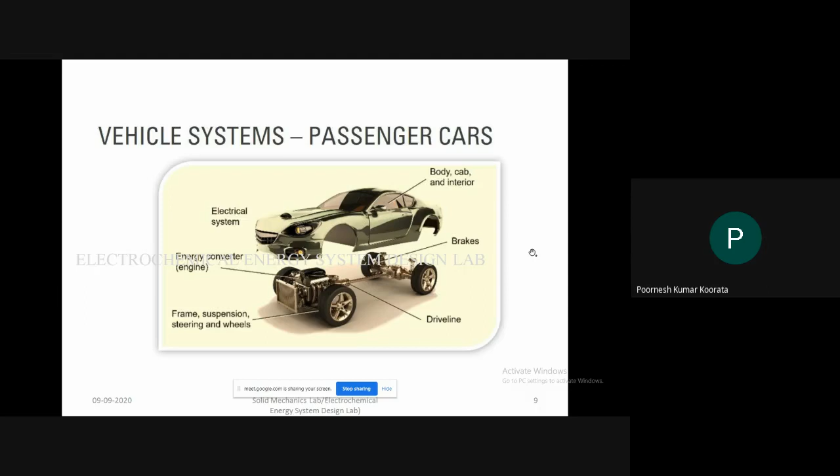Now, what we call a general powertrain, we mean the IC engine powertrain. There is nothing like a general powertrain. We have to distinguish whether it is run by an IC engine or any other power source. So depending on the power source, we have the powertrains here.

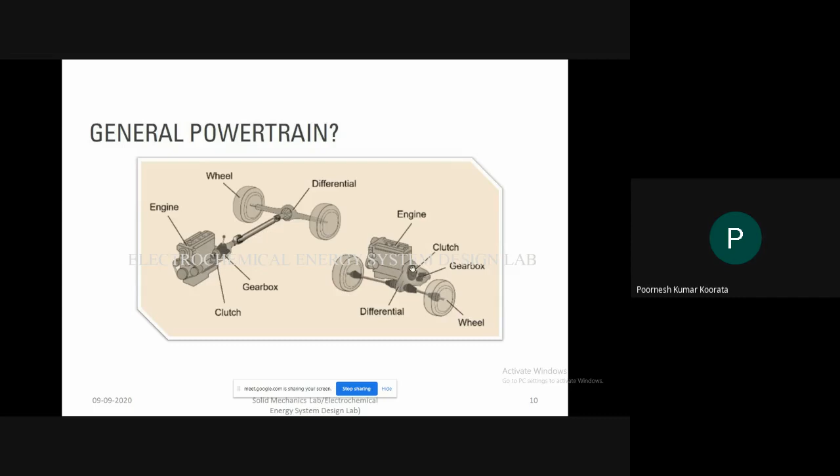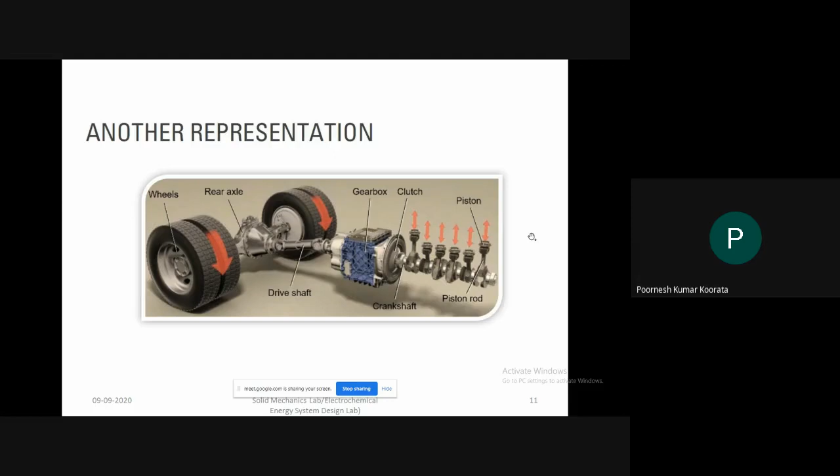For the IC engine, you have the power source in terms of engine, differential gearbox, and wheel. So engine to wheel transmission, and on the axle you have a gearbox and clutch with the engine, differential gearbox, and wheel. Another representation of the same is that you have the wheels and axle. Power is provided by the engine, with clutches to manage the power with the help of the gearbox and the drive shaft. So this is the conventional notion, sometimes referred to as the general powertrain, but it is not general.

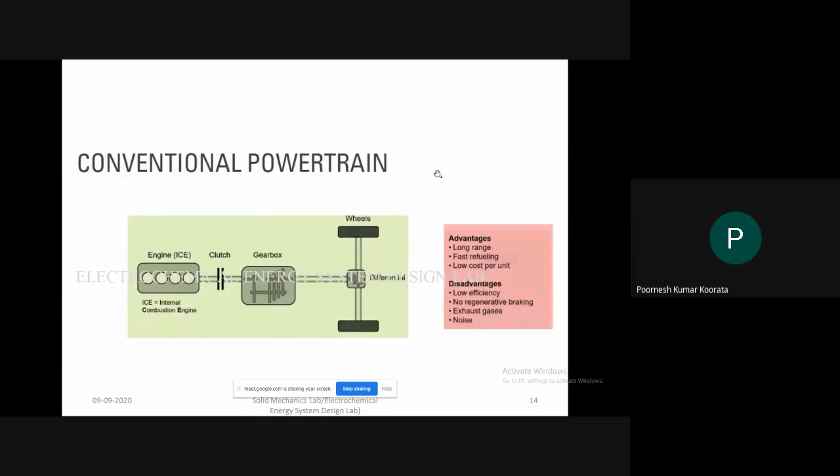Okay. Here I want to mention that energy density and power density are different. So battery has a good power density, but it has a lower energy density. So compared to supercapacitor and battery, supercapacitor has a high power density compared to the battery, but it discharges at once. So that's the drawback there. So battery is somehow suitable for electrical vehicle applications. But this factor we need to address.

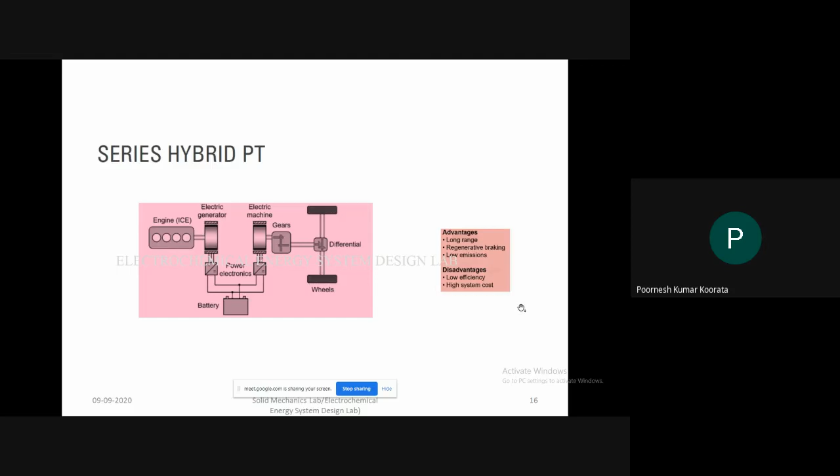And parallel hybrid is another concept where you have power either produced by electric machine or engine. So you have a parallel combination here with respect to engine and electric machine. So here you are actually taking care of the drawbacks that the series hybrid powertrain was having, that is in terms of the sizing. You can downsize the whole powertrain system with parallel hybrid, but it has also some other disadvantages like limited regenerative braking, because the generator component is not there here.

But some vehicles are having this. That's why there is limited regenerative braking and also higher cost. So other advantages are regenerative braking is there but limited. Design similar to conventional vehicles because it doesn't have a series combination there. It's a single powertrain, so you can have the advantage in terms of this parallel hybrid powertrain.

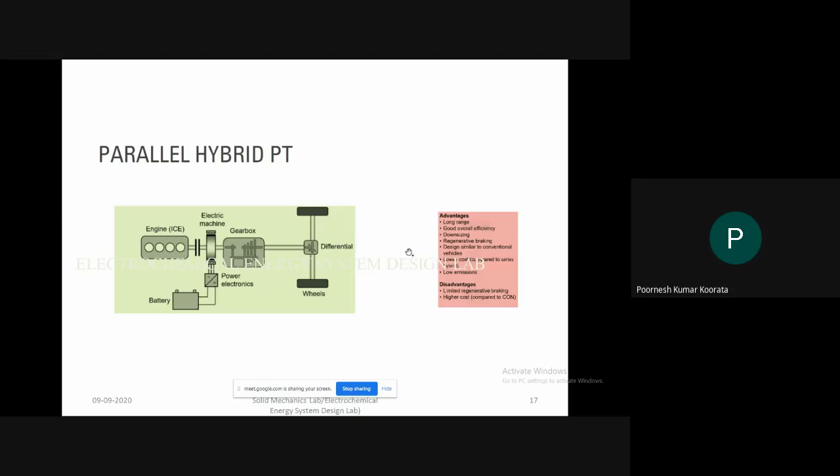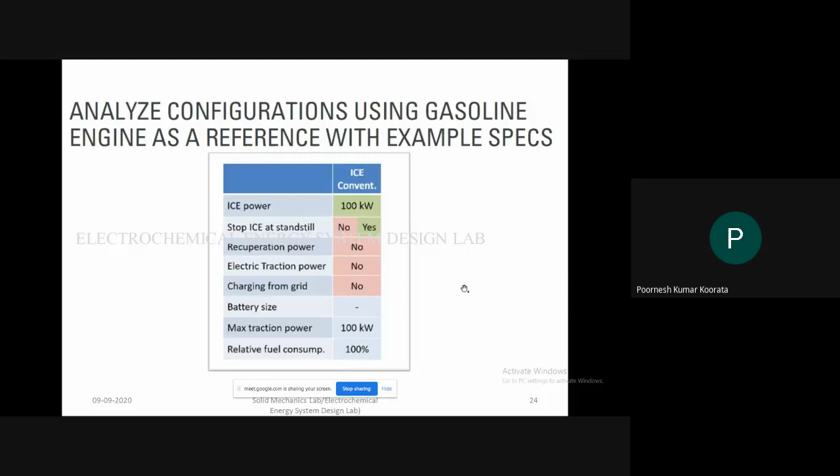Okay. A mild hybrid, one of the examples here. Now, so I have explained you that it should meet the fuel consumption standards at minimum cost. Okay. So customers not paying extra for low fuel consumption. This is the requirement. So it's similar to the basic conventional IC powertrain. For some performance improvement, that means you can reduce the size of the IC engine if you implement the mild hybrid. So how does it play? So IC power

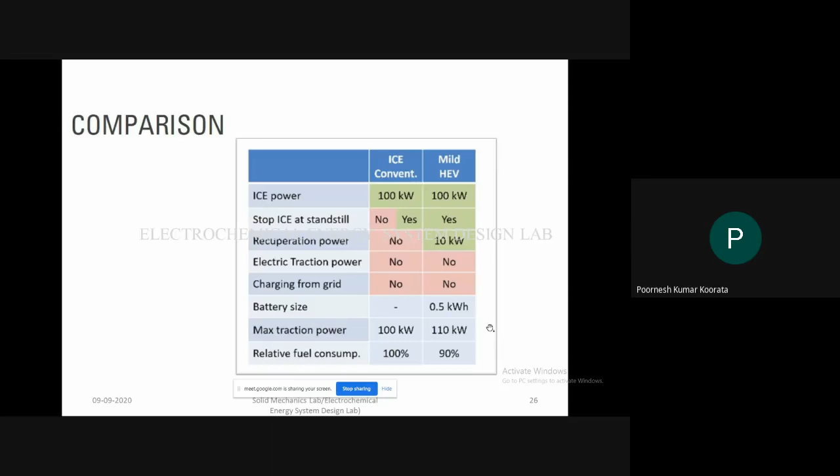Now full hybrid. So this is a bigger electric machine requirement. Toyota Prius is an example. Most of the braking is regenerative. That means you need to have that component, and all electric drive mode at lower power demand. Okay. Medium performance improvement compared to the mild hybrid. So in that perspective, if you see, there will be a regeneration. Also, there will be an electric traction power.

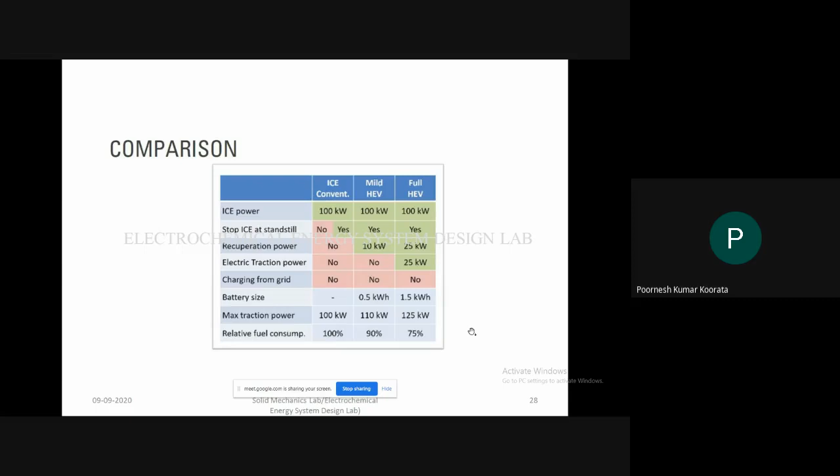Okay. So the power is utilized from IC power plus electric traction, either of these two. So that's why 125 kilowatt is the maximum traction power available. So the battery size also increases from suppose 0.5 to 1.5 kilowatt hour. Now in this case, the fuel consumption will be better. That's around 75% consumption.

A plug-in hybrid. So whenever the concept of plug-in hybrid is there, you mean that battery size will increase. Okay. So modest performance in all electric mode. It will give a good performance in all electric mode. But the driving range is limited to around 50 kilometers. So based on the conventional ICPT, there is a performance improvement, and Volvo V60 is the example for that.

Okay. Now, if you compare that, you will have IC power 100 kilowatt, then stop IC at standstill, yes, possible. Recuperation power is 50 kilowatt, higher. Regenerative is higher, electric traction is higher. So the maximum traction available is 150, 100 plus 50. So you will have 150 kilowatt. And also you will have the higher battery size. That's why you have the higher electric traction power here. So 10 kilowatt hour battery, and fuel consumption is 25 to 50%. See there.

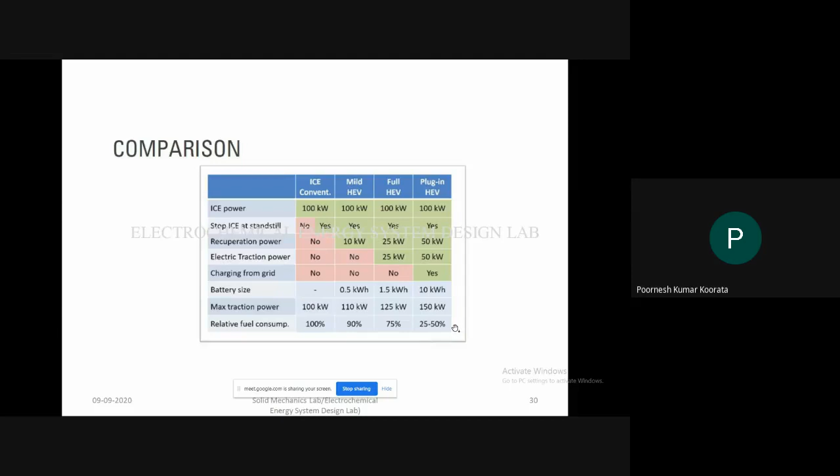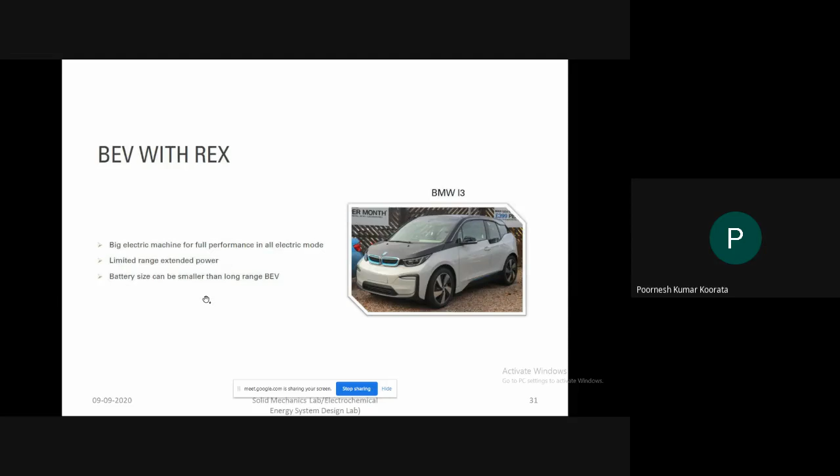Now BEV Rex will have the example of BMW, and it will have the big electric machine for full performance in all electric modes. So limited range extender power will be there, and battery size can be smaller than long range BEV, because this is a range extended, just an upgradation of the previous plug-in hybrid. So you have the BEV Rex option. Now in that case, you will have the compromise.

You can compromise with respect to IC power, because you have a lot of power generated with respect to the electrical thing. Okay, battery size is bigger. So 100 kilowatt you can get from the electric traction. Also you can regenerate; whatever the lost power, you can recuperate that power. Plus you have extra auxiliary kind of power from the IC power. Battery size is higher, more than 20 kilowatt hour. So maximum traction available is 100 kilowatt. So you can see the relative fuel consumption has gone from 100% to 10% here. BEV Rex. Okay.

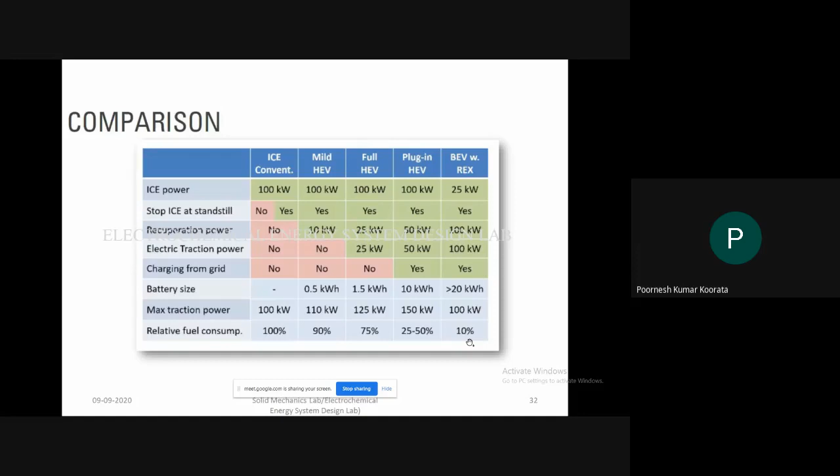Now going for the full electric, one of the models shown here is of the Tesla. A big electric machine is required, which allows full performance in all electric modes. So range is more than 200 kilometers. Fast charges to extend range. So you have the higher range here, not just extended, it's a good range, 200 kilometers.

Now here, if you compare, then there is no need of IC infrastructure or ICPT. So the IC power for the BEV is 0, it's not relevant at all. Stop at standstill. So recuperation power is 100 kilowatt and electrical traction power is 100 kilowatt. So maximum power traction is 100 kilowatt. So you will have the fuel consumption is 0%. So see the evolvement from 100 to 90, 75, 50 and to 0. So this is how you have come to the BEV stage where the electric machine plays a major role in terms of fuel efficiency, fuel consumption.

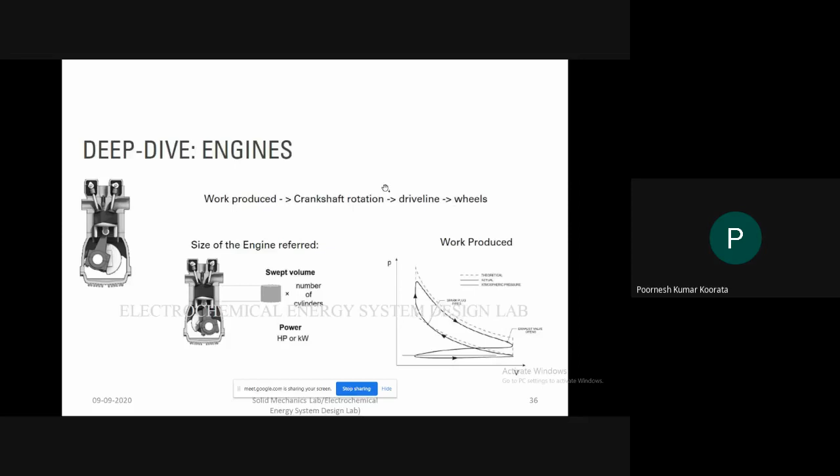So you have the theoretical and actual experimental kind of a loop here. Experimental curve. So theoretical curve is only like this. So you can see that based on this, efficiency of the IC engine can be predicted. So size of the engine mainly refers to the swept volume, how much volume can sweep, and the number of cylinders. So the power is actually given by HP or kilowatt. So it's in a very broad context I am making this statement.

Now, if we are going for the IC engine, we have to take care of the losses. So a lot of work is going on there. I think your HOD might be familiar with this. So engine available work is gross work minus the pump losses, mechanical losses, auxiliary power losses. You can say that if you have the 100% availability of energy, then there will be a heat loss, heat loss due to exhaust loss, pumping loss, friction loss, and final power obtained is only 20% there. So this is the powertrain output you will have.

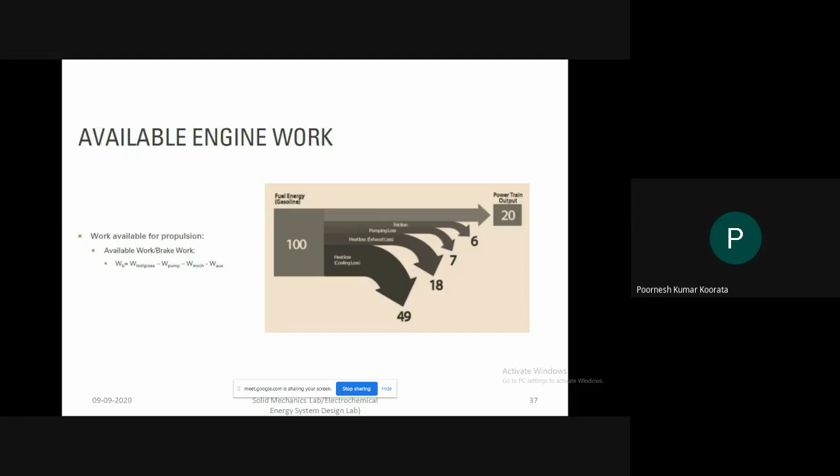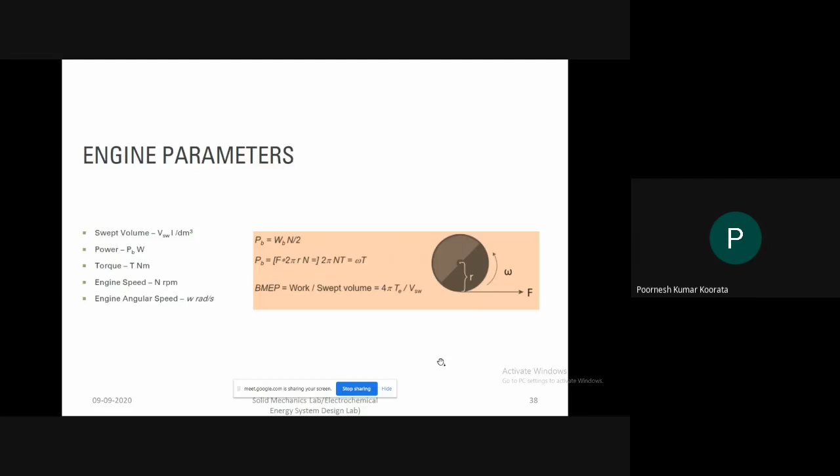Now these are engine parameters where you have the PB, that's the effective work, what you got. WB is this one, available work. So available work N by 2. PB can also be written in terms of the rotation into torque, and BMEP, that's the work by swept volume, can be given by this term here. So these are the familiar terms with respect to swept volume, power, torque, engine speed, and engine angular speed. So this is the important factor, factor R, crank radius there.

Now efficiency, coming to the efficiency, you have this PB by PC. So PC is nothing but the fuel power. Then brake specific fuel consumption, if you want to go, you need to know the MF, that is the fuel flow into the engine divided by PB. This is given in terms of grams per kilowatt hour. Sometimes people also put in kilogram, but grams per kilowatt hour is the usual notion for that.

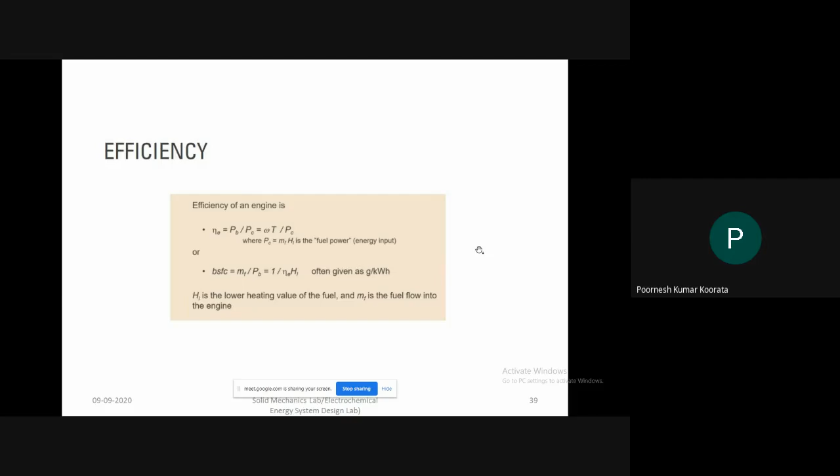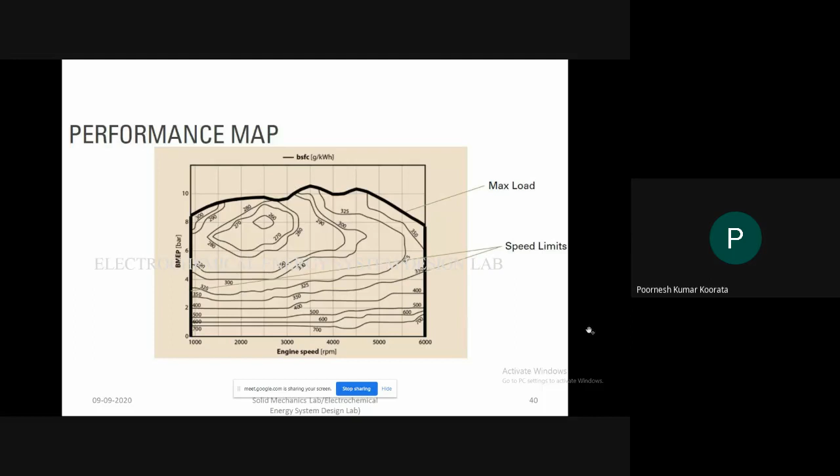BSFC is one of the important parameters, and we want to operate the vehicle, of course, where there is a low consumption of the fuel, right? So we don't want to consume the fuel too much. So this is the area where we want to operate, but for the practical conditions, we may have to check how this performance will vary. So I hope you got the knack of this performance curve.

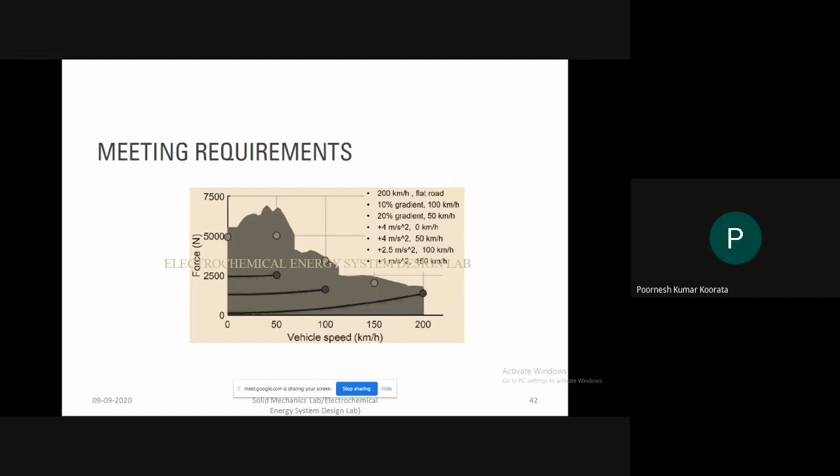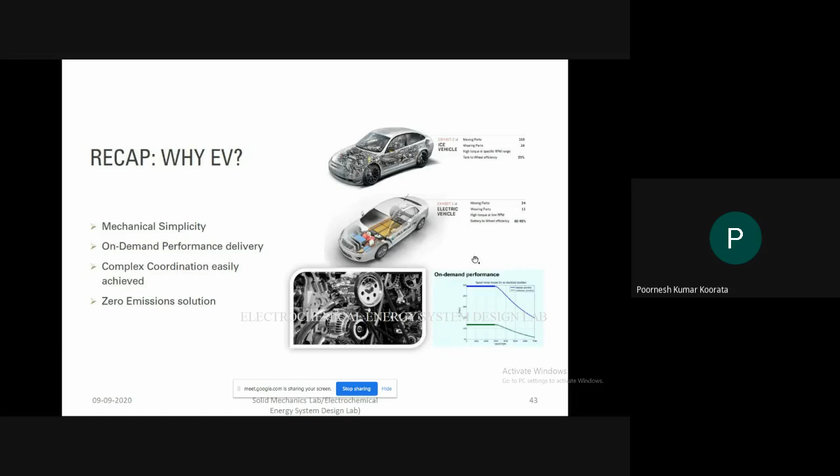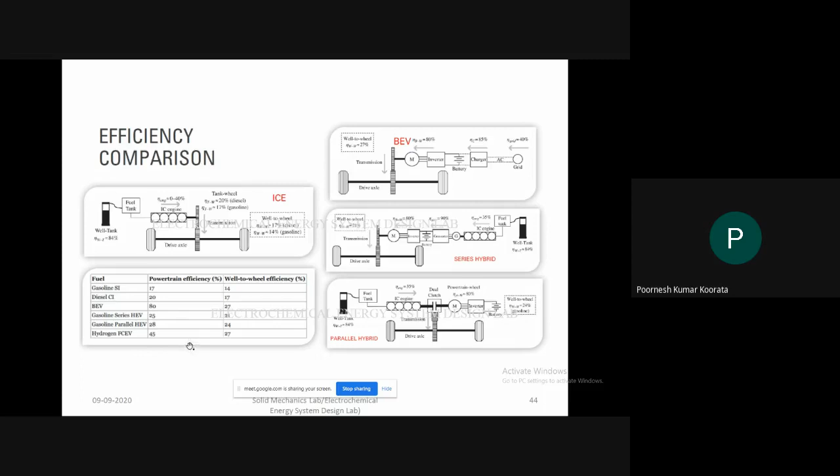I'm also taking the course on that, actually, hydrogen FCEV. Anyway, coming to electric machines as powertrain. The design parameter here becomes the shaft torque versus shaft speed. Okay. Now electric machines will have armature, right?

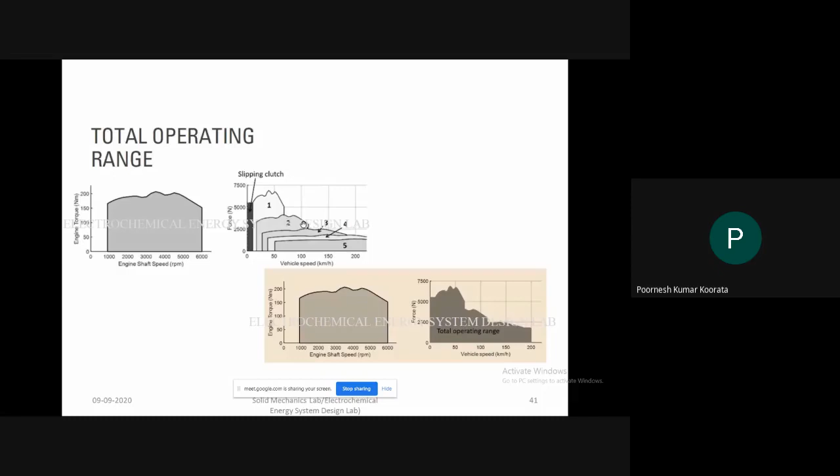So there are many issues with the IC engine in that respect; you have limited flexibility. You see the curve I've shown here. If you are going from the first curve to the second curve, there will be a grayed out area, which cannot be operated by the IC engine. But the electric machine is flexible. It can operate within this range.

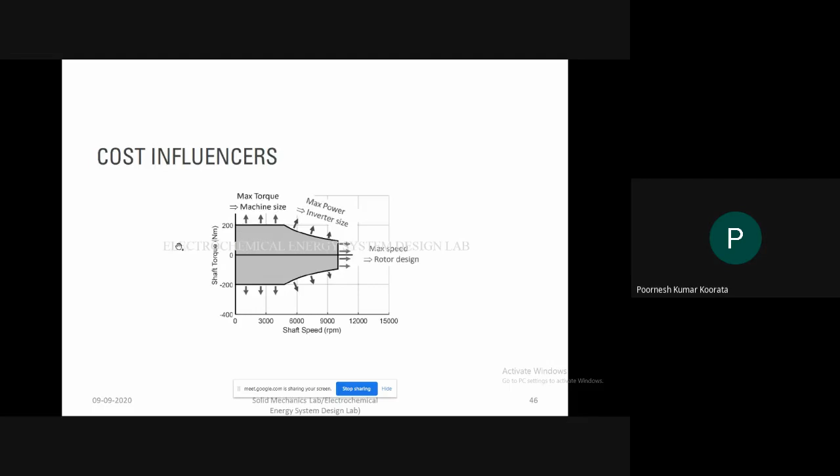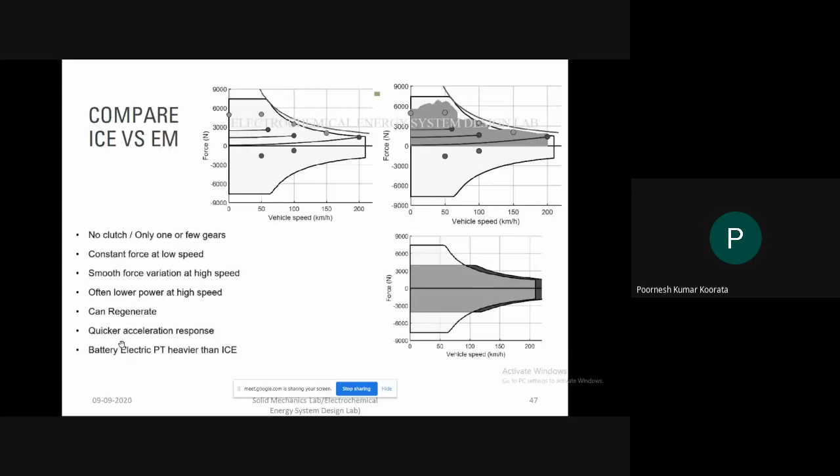Very smooth transition. Often lower power at high speed. Okay, so can regenerate, quicker acceleration response. Battery electric powertrain is heavier than IC engine because the weight component is mainly coming from the battery actually.

Now this is an application example of how you control. Can you predict the performance of the plug-in hybrid electric buses? Okay. So plug-in hybrid means you will have the engine as well as the battery electric machine, right? So CNG engine, you have electric machine, controller for the battery here, and wheels. So this is some of the real picture of the powertrain.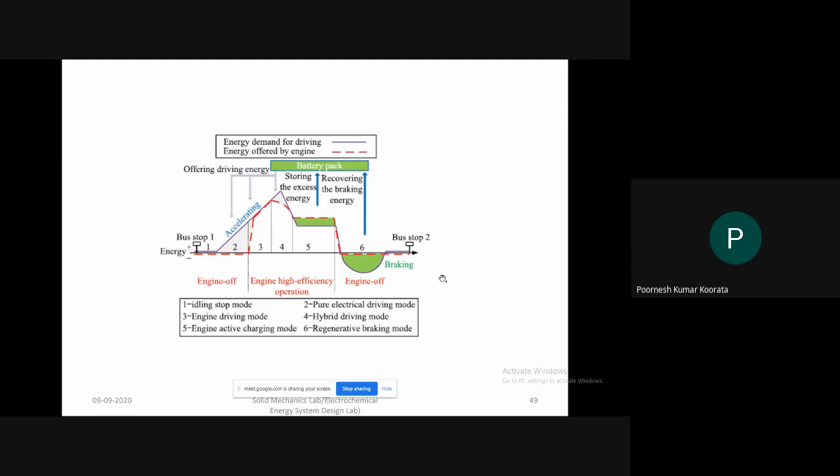Okay. So the idling mode to regenerative braking mode, whatever this color is coming from the battery pack. Okay. So regenerative braking mode. There are many different modes which can be utilized either from the engine or from the battery. So these are the typical requirements. Now, if you see a city bus, then its speed may vary. Okay, this is a driving cycle, what we call. So bus cycle may have variations like this.

Okay, it's very typical. Now you can actually understand how this affects the efficiency by AI or the K-means principle. So you need to get all the driving cycle patterns, then get the K-means, means at a specific point how many drive cycles are matching those points. You get the K-means, then using the K-means you try to approach the Markov chain based principle to predict the driving cycle pattern. Okay, depending on the driving cycle pattern, you get the performance curve.

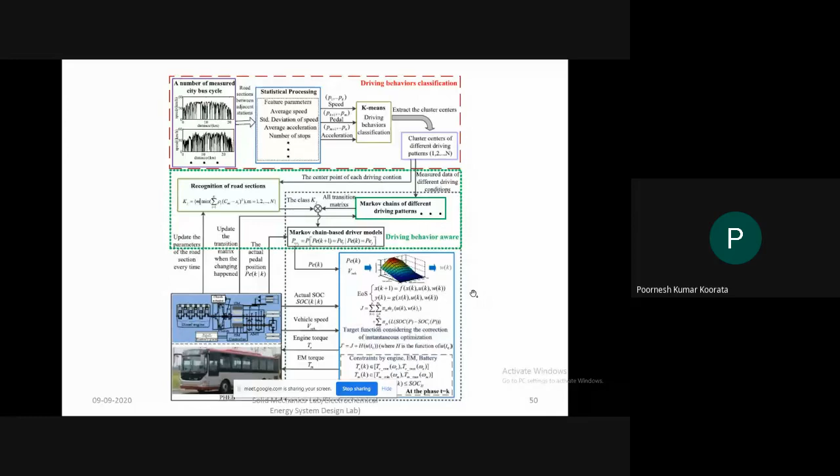So you try to compare whether it is falling under your engine efficiency or the motor efficiency. Then you can actually control the parameters, okay, of the engine or the electric machine. Now these are the different driving behaviors you will see in various steps. So medium speed with some traffic jam, upslope mostly, high speed smooth traffic, upslope mostly. There are various conditions. All the various conditions you can implement in the model.

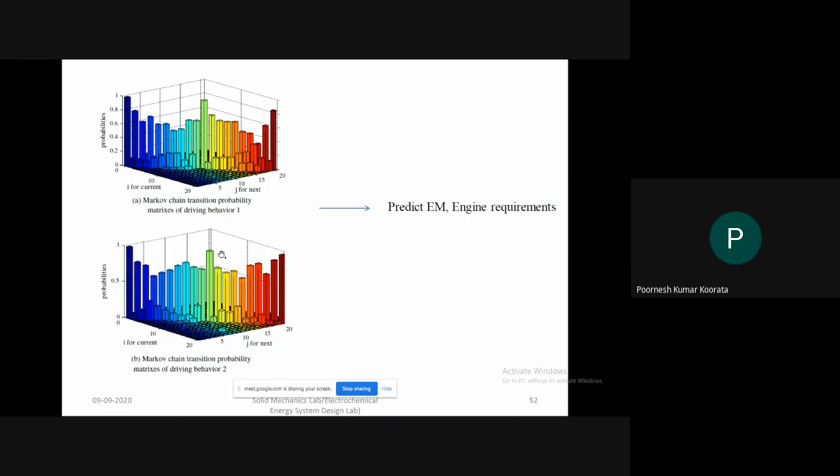You try to get the real grasp of what is happening with respect to the efficiency, then try to get the Markov chain transition probability. That means these are probabilities that the bus will go to a certain point. Okay, high velocity. Okay, so these are very sudden transitions. So with respect to that, how your model behaves, how your engine behaves, that you have to see. So using this Markov chain transition probability, you can predict the EM and engine requirements.

So this is the result obtained for various mechanisms. That is predictive control, model predictive control. This is the stochastic model predictive control. This is modified stochastic model predictive control. Okay. So three different methods. This is the real practical driving cycle one experiences in daily life. So this is not a standard; it's a real working condition.

So for this one, how does the EM electric machine torque versus speed work, and how does the engine torque versus speed play out? That you have to see. And we see that most of the points are almost in this region. That's a good thing because here the fuel consumption is low. Okay. Again, you can try to improve by shifting these points to this region. You can play with the parameters and try to see how this plays out.

Okay. So anyhow, these are the points you will come across in the real working conditions. But as you see, this is the European standard test cycle. So you will see that the number of points are actually less here compared to the practical working conditions. So real working conditions will give you a tough experience in controlling the EM or controlling the engine dynamics.

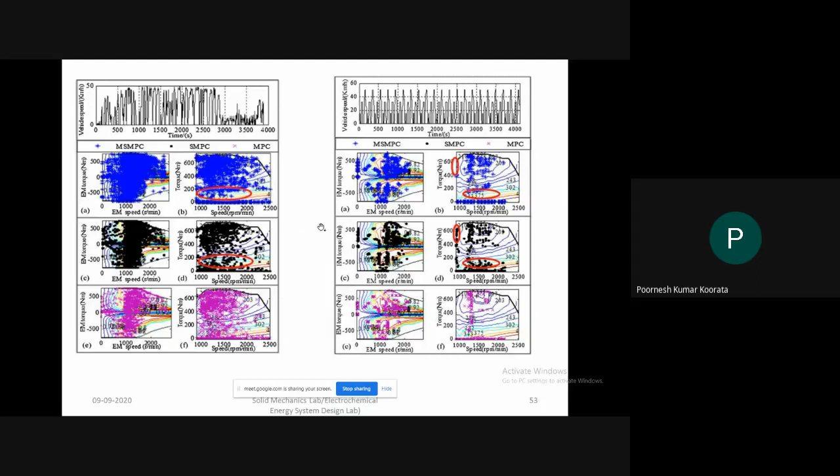So the first one being, what is the range of voltage to operate battery vehicles? Which battery vehicle? Four-wheeler battery vehicles, sir. No, there are various things. If you are mild hybrid, then you have the set of batteries with the 48 volt battery setup. Then if you are going for a fully battery electric vehicle, then the battery size

actually scales up. I told you that this is a 5-day session, so that's why the battery concepts and sizing concepts I could not include. If you go through that, then you will understand how the voltage and current can be controlled using series and parallel combinations of the batteries, depending on the power requirement and also space requirement. So that is one of the questions.

And the second one is, what are the research opportunities for thermal engineers in battery operated vehicles? Yeah, there is a lot. Actually, I'm doing it for the company. We are actively engaging with battery thermal management. A lot of things are happening in battery thermal management. Even startup companies are working on that, like in Bangalore, there are a lot of companies.

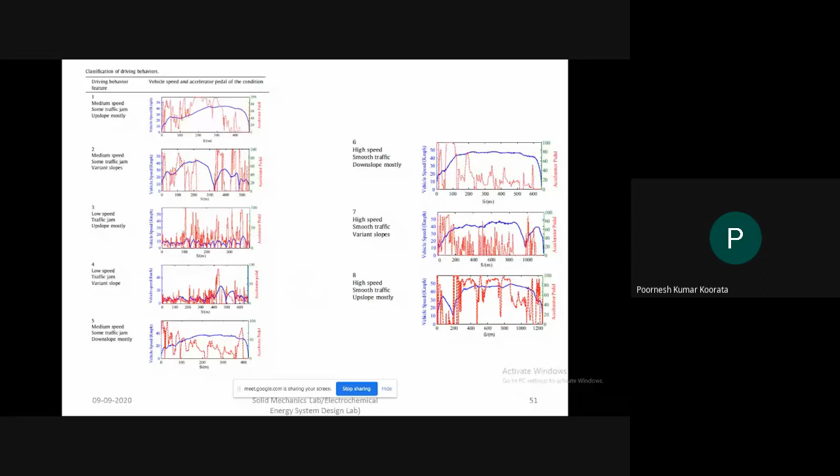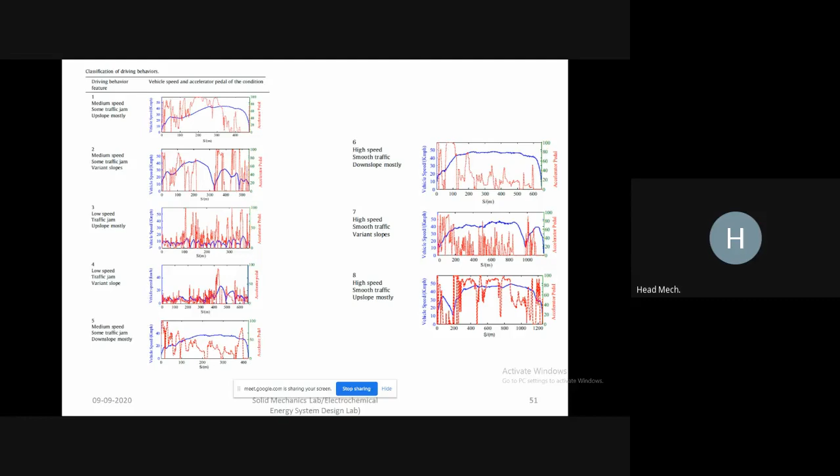Okay, sir. And there is a basic level question. Sir, you had briefed about the negative impact of the new ecosystem on conventional engine systems. Based on your experience, what's your future prediction for the automotive industry? Will traditional engine systems vanish soon?

Soon is a tough question actually. I will tell you that for heavy vehicles, the IC engine will be there, but actually the hydrogen fuel cell system is overtaking the battery system in trucks or heavy segments. In that also, the IC engine is phasing out. So that's the problem there also. But not any time soon in India. We may expect a decade more for the IC engine. So still a lot of things are there.

Okay, sir. A few other questions are also there. What are the current issues related to batteries in electric vehicles, and how to overcome these issues?

I told you that one of the issues is, suppose you are taking two-wheelers, then you have the issue with prismatic or cylindrical cells, which one is optimum, and you also have to develop a thermal management system for two-wheelers, because you can optimize the size of the battery and sizing of the battery. So that is one thing. Another thing is size, cost. A lot of things are there.